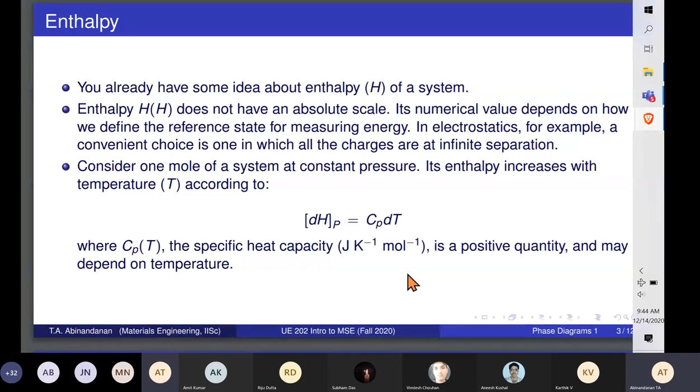Right. Next is entropy. So again, you are exploring some aspects of entropy in your modern physics course, and you probably have seen this earlier, but very colloquially, it is seen as a measure of disorder in the system. So one of the ways in which you can think of this is that a liquid form of an element has a higher entropy than its solid crystalline form, because we have this notion that in the crystal, the atoms do not really have much freedom, and therefore things are fixed and highly ordered and so on.

Whereas in the liquid, atoms have lots of freedom to move about, and so the number of possibilities in which atoms can organize themselves in the liquid form is way too high compared to what they can do in the crystalline form. So one thinks of liquid having a higher entropy.

Entropy, unlike enthalpy, has an absolute scale, and so it is defined in macroscopic thermodynamics using the third law, and one says that its value is 0 for a perfectly crystalline element at 0 Kelvin. And then of course we also have this relation, which again comes from thermodynamics quite nicely.

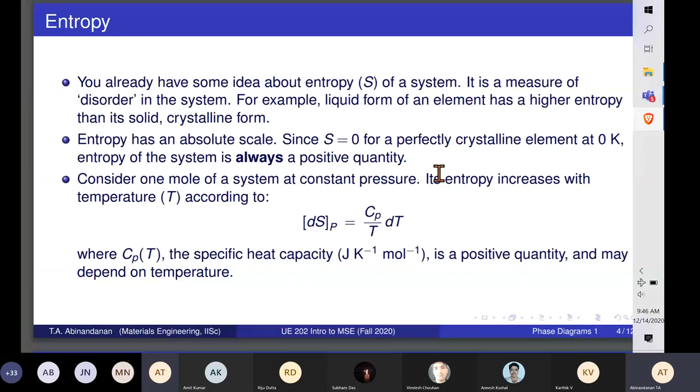The change in entropy at constant pressure of a mole of a material is given by Cp over T dT. Since Cp is a positive quantity, temperature is a positive quantity, and the entropy has a floor which is 0 at 0 Kelvin, entropy therefore is always a positive quantity. So keep this in mind when we move forward.

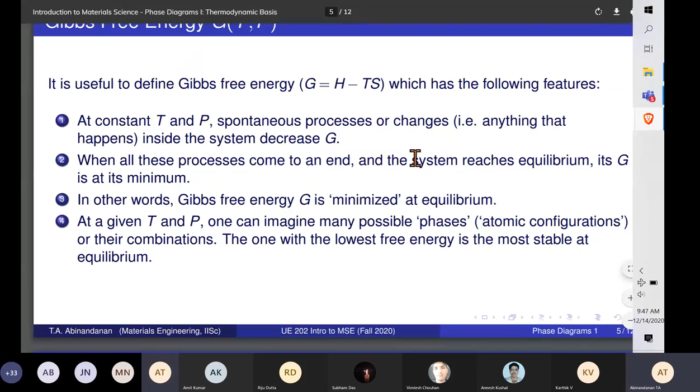Okay, so let's now define something called Gibbs free energy, and its definition for 1 mole of a material has this appearance: H minus TS. And it has the following features. At constant temperature and pressure, spontaneous processes or changes within the system. By this, we basically mean things that happen at constant temperature and pressure, such as solidification of a supercooled liquid and things like that.

So the spontaneous processes or changes have the effect of decreasing the system's free energy. And so when all these processes come to an end, the system reaches equilibrium. So therefore, its G is at its minimum. So there are 2 ways in which the same statement is made. Gibbs free energy G is minimized at equilibrium.

And another way of stating the same thing is that at a given temperature and pressure, one can imagine many possible phases or atomic configurations or their combinations. And the one with the lowest free energy is the most stable at equilibrium. So we are going to make use of these statements as we move along.

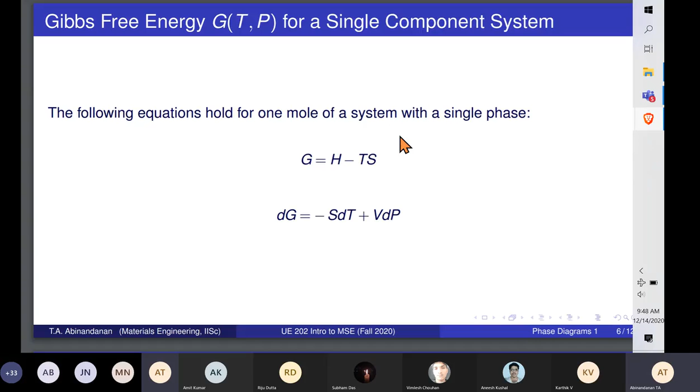And now let's talk about the slopes. All of them are sloping downwards; in other words, their slopes are negative, and that's because del G del T is minus the entropy, and S is always positive. And the second feature is that the magnitude of the slope becomes larger and larger as you go to higher and higher temperatures.

And that's because S keeps getting more and more positive at higher temperatures. So S at a higher temperature is higher than S at a lower temperature. Therefore, the magnitude of these slopes must be even higher at higher temperatures. Because of that, they all have a negative curvature.

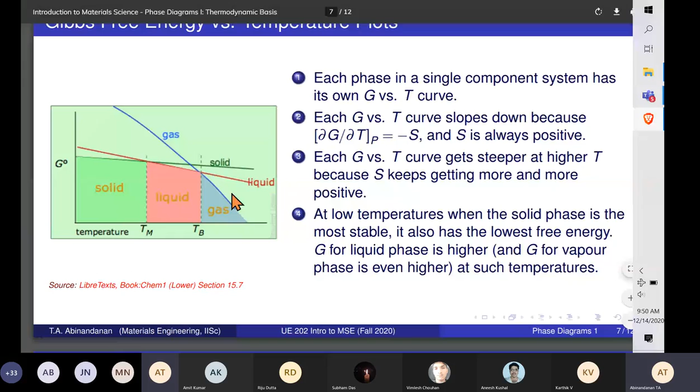And if you put both these facts together, then you realize that the red curve, since it is having a larger slope, which is also increasing in magnitude as you go to higher temperatures, would at some point overtake the curve for the solid at this temperature. And this is a temperature that we normally call the melting point. Similarly, the gas also overtakes in stability beyond the boiling point. And all of them, remember, have been drawn for a particular pressure, let's say 1 atmospheric pressure.

All right, so this then tells you that the solid is stable up to the melting temperature, and at the melting temperature, both the liquid and the solid have the same free energy, and therefore, if you think in terms of delta G going from liquid to solid, it is then 0. And between the melting temperature and the boiling temperature, liquid is the most stable form. And then beyond the boiling point, gas is the most stable form.

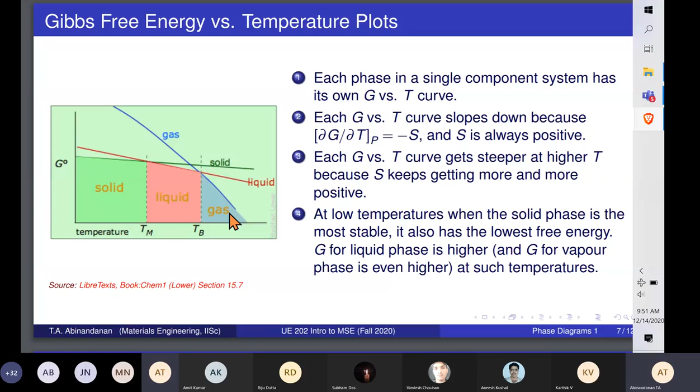And of course, we have seen all kinds of other complicated phase diagrams involving ice and iron and so on. So you can draw similar things at other pressures and then see what their stabilities might look like. So anyway, we want to look at the effect of pressure on this.

So the way we do this is each of these curves moves up by the phase's volume times delta P if you increase the pressure by a small amount delta P. And that's because del G del P is the volume, and volume by definition is positive. So all of them move up by a little. Since the molar volume is different for different phases, they will all move up by different levels, and therefore the new curves that you draw at a higher pressure will intersect at other temperatures.

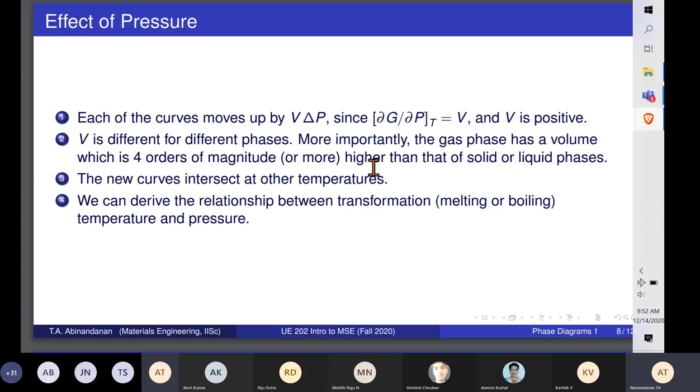More importantly, the gas phase has a volume which is like 4 orders of magnitude or more higher than the volume of solid or liquid phases, and that is what we want to be looking at later. So using these features, we can derive mathematically, algebraically, the relationship between the transformation temperature and pressure. So the way we do this is the following.

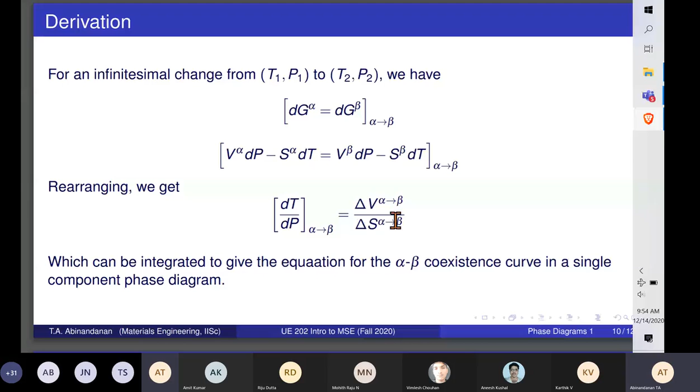So, and that yields very quickly certain interesting results. Qualitatively, for solid to liquid, if you look at the melting temperature, the delta V is of the order of a cubic centimeter per mole. I will clean up these things and upload these slides once more. So this is about 1 cubic centimeter, rather 10 to the power minus 6 cubic meter. Whereas for liquid to gas, it is of this order, so at least 4 orders of magnitude higher. So that's on the numerator here.

For elemental metals, take this as a given, but these are all empirically determined correlations. The delta S per mole for melting is of the order of 10 times the melting temperature, whereas delta S for, this should be liquid to vapor, so this is for boiling, is of the order of 100 times the boiling temperature. Again, there is a mistake here. I'll clean up this and post it again. So you get this relation.

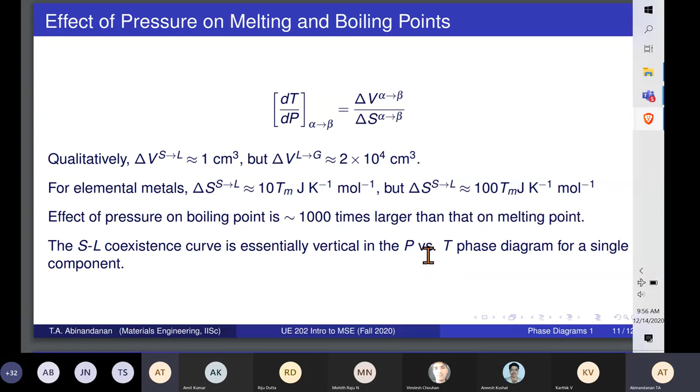So the bottom line is that the effect of pressure on boiling point is at least 1,000 times larger than the effect of pressure on the melting point. The factor of 1,000 comes because you have this factor of 10,000 here and a factor of 10 here, so putting them together, you get this really huge difference. More importantly, the melting curve in the phase diagram is essentially vertical when you look at it in the P versus T phase diagram, P on the y-axis and T on the x-axis, for a single component.

So we can do a little bit more for the boiling temperature. Since the volume of the gas is tens of thousands of times larger than the volume of the liquid, we can approximate the delta V to the volume of the gas itself, and then assuming ideal gas behavior, we can replace this V sub G with RT by P. And similarly, the delta S, the change in entropy, is basically the latent heat of boiling divided by the boiling temperature. So putting both these things together, we arrive at this relation, which can be integrated quite easily. This is what we end up getting.

So we see that the liquid gas coexistence curve has this relation, that is log of P when it is plotted against 1 over T would be linear, which is pretty nice, assuming that all these things are constant. We are assuming that this is a constant. R, of course, is a constant, and T0 and P0 are reference pressure and temperature anyway.

So because of that, you would expect this to be linear if the latent heat is a constant. And for many substances, this has been confirmed by and large, at least within the usual pressures that we normally encounter, not extremely high pressures. This delta H turns out to be constant, and because of that, you do get a linear relationship between log P and 1 over T.

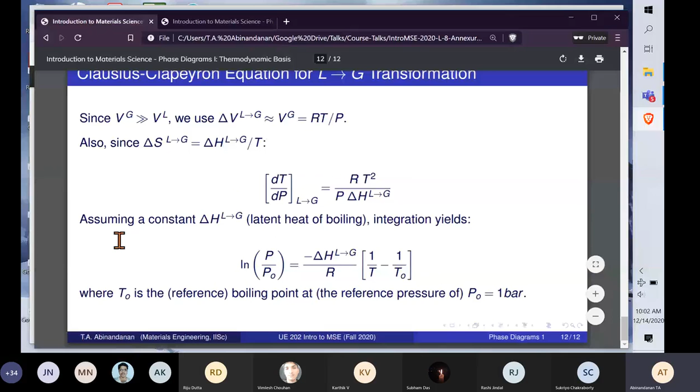All right, these are binary systems. So again, phase diagrams, general boilerplate about what phase diagrams are. They basically are diagrams in multi-dimensional space, and they divide that space into different regions, which we will be able to identify. Each region will tell you what phase is present, and if multiple phases are present, it will also tell you what the composition of each of those phases would be. So that's effectively what phase diagrams are.

And so we are making the next important leap here. This leap is from one component to two components. The main difference is that in the one component system, for 1 mole of a component in the solid phase, there is no composition variable. The entire solid is just 1 mole of that species. Whereas when we talk about the two different phases that exist, solid and liquid in an alloy, for example, then you can ask the question, what are the compositions of those two phases? Solid in principle can have a composition which is different from the composition of the liquid. And that is the leap that we are making when we go from one component to two components.

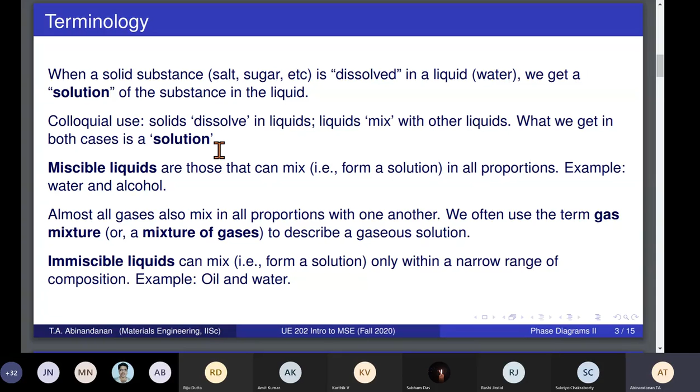This is an everyday thing, and because of this, these words, immiscible and miscible, have entered our vocabulary, mainly because we think of solutions being formed when liquids mix with other liquids. And that idea is carried over to solid solutions as well. When you combine two solids, let's say copper and nickel, which is what we will look at later, they actually form a series of solid solutions right from the copper end to the nickel end. They mix in all proportions in the solid state as well. Okay, quick intro.

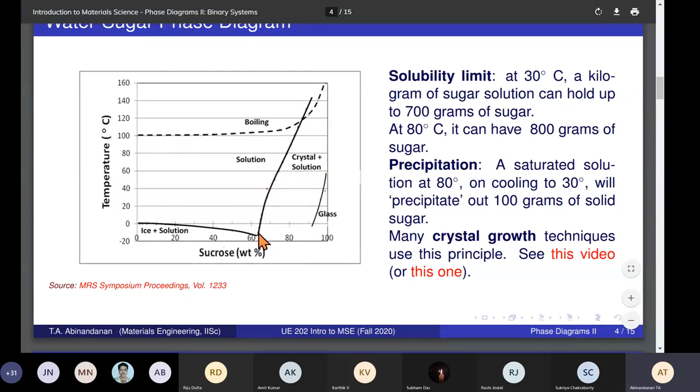So here is the water-sugar phase diagram, and it has this behavior. The low temperature behavior is not fully captured here; there are some interesting things there, and there is some paper in chemistry that actually talks about the low temperature behavior. We will also look at the water-salt phase diagram later, which in the relevant part behaves similarly. But here is our normal experience, room temperature to about the boiling point or so.

And here it basically says that you form a solution when you dissolve sucrose. The x-axis is in weight percent. So you can dissolve sugar up to an extent given by this curve here. Beyond that, whatever extra sugar you add will simply sink to the bottom. So that is effectively what this line says. It separates the state where you have two phases in equilibrium from the state where you have only one phase in equilibrium.

This curve, which separates a single phase solution from the solution plus crystal two-phase region, has a positive slope, which means at higher temperatures you'll be able to dissolve a lot more. So at 80 degrees Celsius, 1 kilo of solution will have as much as 800 grams of sucrose and 200 grams of water. But bring it down to, let us say, 30 degrees Celsius, and it comes down to about 70%, which means 1 kilo of solution can accommodate only 700 grams of sugar.

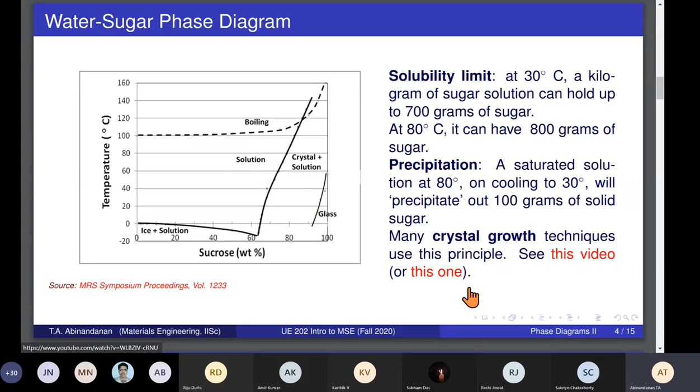By the way, this is also the method used for producing single crystal silicon from the silicon melt, as you have seen in the video. There it is from the silicon melt itself, but one uses the same idea of a particularly oriented seed, and then you allow silicon to deposit itself onto this seed very, very slowly. In that video it also said the process can take a couple of weeks.

All right, so we have basically established a big chunk of whatever we want to talk about. So let's quickly go to a simple phase diagram. Because we are dealing with two components, there is a composition variable that also enters the scene. And with the temperature and the pressure as the other variables, these diagrams are basically three-dimensional in nature.

And we take a constant pressure cut. So these are sections of this 3D phase diagram at a constant pressure where we can continue to use temperature and composition as the main variables. And this works for materials science primarily because we are largely interested in liquids and solids. But chemists and chemical engineers are interested in liquid-vapor equilibrium. Even they would use these 2D sections of the 3D phase diagram at constant pressure.

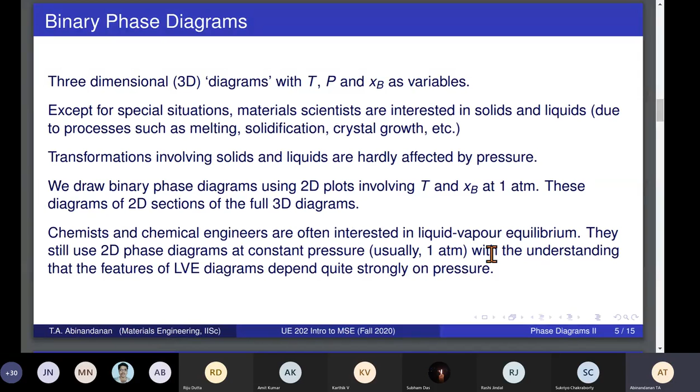But if they need information at higher pressures, they would take the appropriate cuts at those higher pressures and use those as well. But there is a clear understanding that the phase diagram features would change quite significantly in liquid-vapor equilibrium phase diagrams when you change the pressure. But in the case of solids and liquids, we just saw in the previous presentation that solid-liquid equilibria are largely unaffected when you change the pressure.

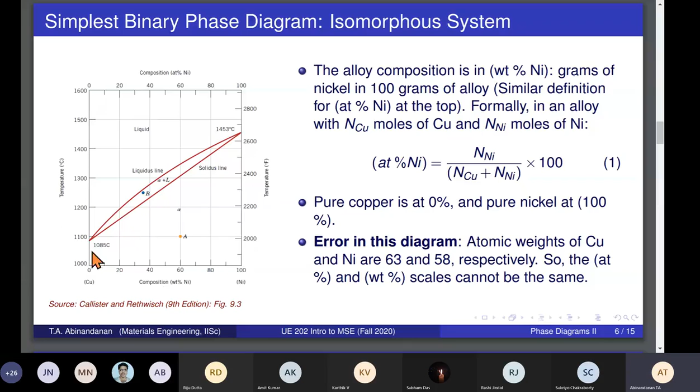Okay, so at the copper end, pure copper, we know, is an FCC solid at low temperatures and it melts at this temperature, and beyond that it exists in the form of liquid. And similarly nickel is again FCC and it melts at 1453 degrees Celsius, and beyond that it exists in the liquid form. At the melting temperature, both the solid and liquid coexist. And the other feature I have to mention, which I think comes in the following slide.

So we get complete miscibility. That is, in the liquid state, copper and nickel are miscible. They form a solution in all proportions. And similarly, they also form a solid solution in all proportions, which basically means that in the solid state, if you take the FCC crystal, copper and nickel atoms are located at random on this lattice.

You will be able to get a sense of the effect when you dissolve nickel in copper by doing all kinds of experiments. One of the experiments that you can do readily is to measure the lattice parameter of the FCC crystal that results. And you will find that as you dissolve more and more nickel, the lattice parameter would change.

I'm not very sure which is the smaller atom here, but if nickel is a larger atom, then you will find that the lattice parameter would change continuously as you go from the copper-rich end to the nickel-rich end. Not quite linearly; it could change linearly as well, but we don't know much about the interactions between copper and nickel atoms.

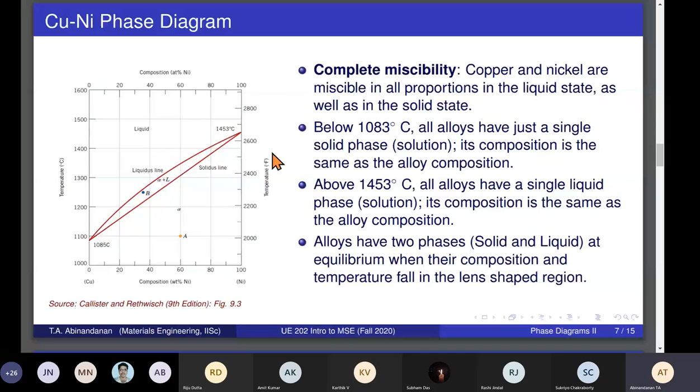So in general, it could be nonlinear as well. The increase or decrease in the lattice parameter of the solution as you go from copper to nickel could be nonlinear as well. So you have at low temperatures a continuous series of solid solutions. At high temperatures, you get a continuous series of liquid solutions. Okay, in between, in the temperatures between 1083 and 1453, this is what we have.

So we find that there is a lens-shaped feature in the phase diagram. The top red curve separates the single liquid phase from the two-phase solid and liquid region in the phase diagram, just like in the sugar plus water situation. And so that top curve is called the liquidus, well, he calls it line, but as you can see, it is a curve. So it is a liquidus curve.

And similarly, the bottom edge of the lens-shaped region is the solidus curve, and that separates the two-phase solid plus liquid region in the phase diagram from the single solid phase region, and that is called the solidus. These are terms that we will use quite casually later on, so it's a good idea for you to get the hang of it and not get confused when these words are mentioned in other contexts later.

So it is quite clear that if you take an alloy with, let us say, 60% nickel, as you keep heating the alloy, it remains in a single solid phase with the same composition as the original alloy up to this point. And then it enters a two-phase region and stays within that two-phase region up to a certain other point. In the example here, I've chosen 40% nickel. So up to this point, that is about 1250.

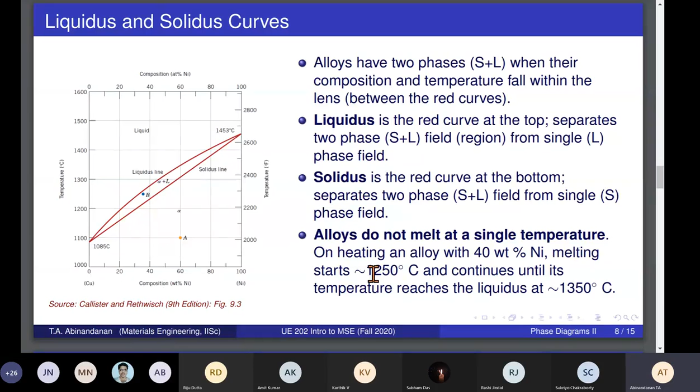All right. So these numbers are obviously wrong. I seem to have misread this. I don't know where exactly I took this from, but anyway, I'll correct these things and repost this set of slides. Maybe I made a mistake. Anyway, never mind.

So here is a situation at 1250 degrees Celsius or so. If you take this alloy with approximately 35% nickel to 1250, then it is in the solid plus liquid region of the phase diagram. Then the question is, what are the compositions of the solid and liquid phases? Are they also the same as the alloy composition, 35% nickel? The answer is no. This again has a solid thermodynamic basis, which we will try to give a hint of in the next presentation. But the mechanics of this calculation works in the following way.

At 1250, you draw something called a tie line. The tie line is basically the line segment at 1250 from the liquidus to the solidus curve. The ends of the tie line give you the compositions of the two phases. The liquidus end of the tie line gives you the composition of the liquid. The solidus end gives you the solid composition. So we will stop here.

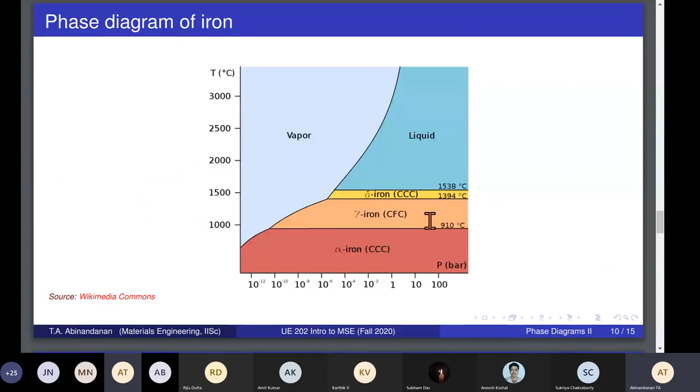Since I copied the previous file and made changes here, I end up getting a whole bunch of things from the previous presentation, but we'll stop now.

And we will come back and do some interesting calculations involving this and use certain arguments to find out the implications when you take an alloy all the way into the liquid state and cool it slowly, and what happens to the alloy as it forms the solid slowly. We will talk about the grain structure, grain morphology a little bit, and also about the composition variations within the grain, and we'll see the reasons for it.

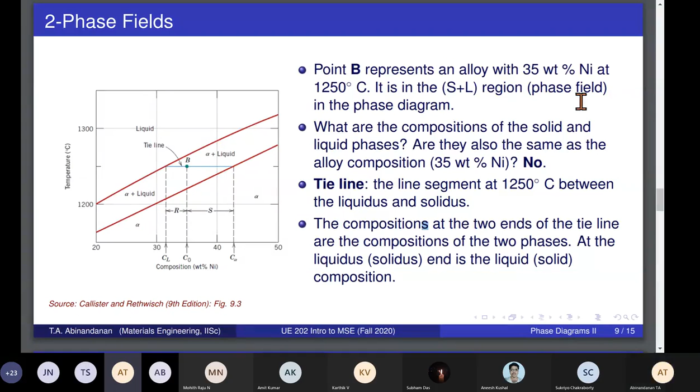Okay, I think some indication of the kind of things that you ought to know in terms of the terminology, that is just jargon: solidus, liquidus, tie line, and this and that. And also the key quantities here. There is alloy composition as well as the composition of the two phases that may coexist at some temperature in that alloy, and so on and so forth. Maybe that would be useful. I will send you that information in a separate document.